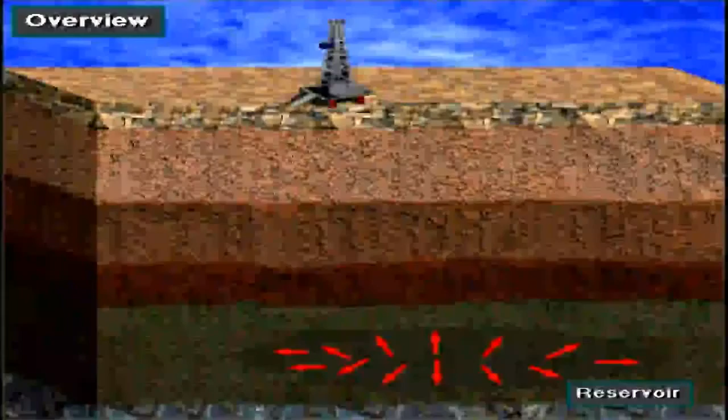Fluids in a formation are under pressure. When drilled, this pressure can escape to the surface if it is not controlled. Normally, drilling mud offsets formation pressure, that is, the weight of the drilling mud keeps fluids in the formation from coming to the surface. For several reasons, the mud weight can become lighter than necessary to offset the pressure in the formation. When this happens, formation fluids enter the hole, this is called a kick.

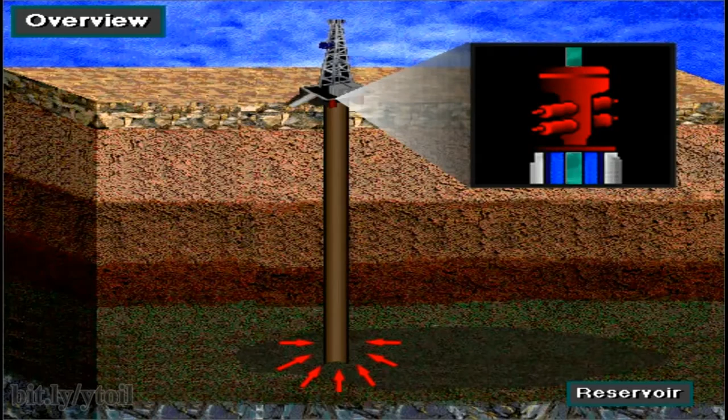A blowout preventer stack is used to keep formation fluids from coming to the surface. These are called BOPs. By closing a valve in this equipment, the rig crew can seal off the hole, preventing more formation fluids from entering it. With the well sealed or shut in, the well is under control.

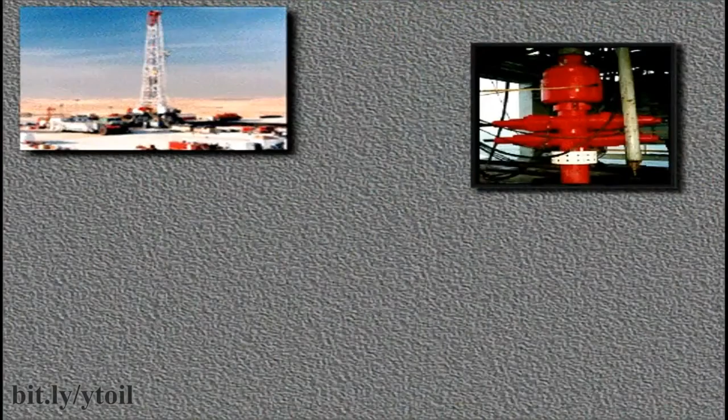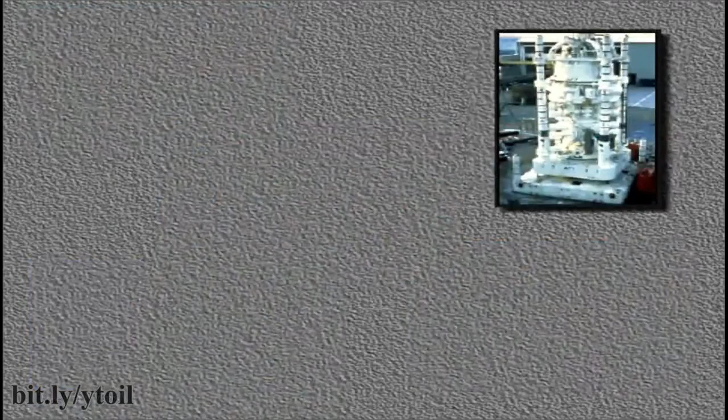Rig crews use a surface BOP system on land rigs, jackup rigs, submersible rigs, and platform rigs. They use a subsea BOP system on offshore floating rigs, like semi-submersibles and drill ships.

Why do you suppose subsea BOP systems are used on semi-submersibles and drill ships? Blowout prevention equipment is very large and very heavy. Semi-submersibles and drill ships are dynamic, that is, they float and thus move with the wind and waves while in the working mode.

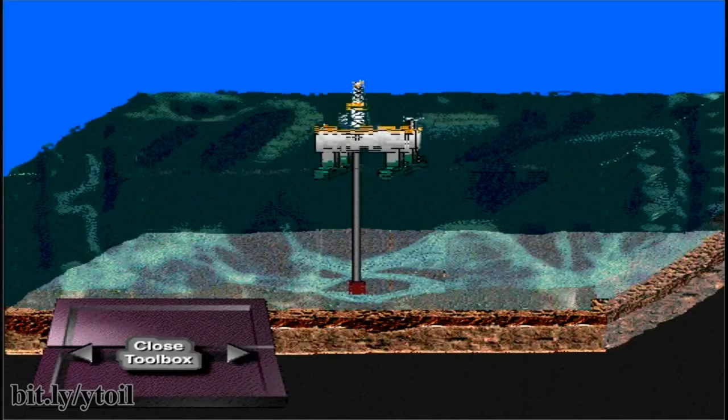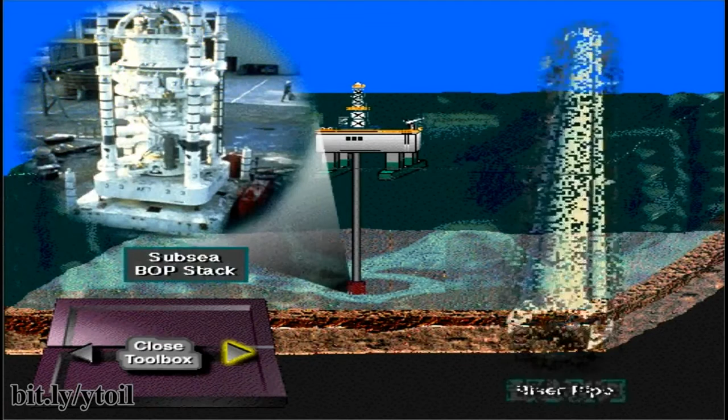On floating rigs, it's not practical to mount the BOP stack on top of the long riser pipe. The BOP stack is much too heavy for the relatively thin and flexible walls of the riser pipe. Also, because the riser walls are relatively thin, they cannot withstand the high pressures that could develop inside the riser

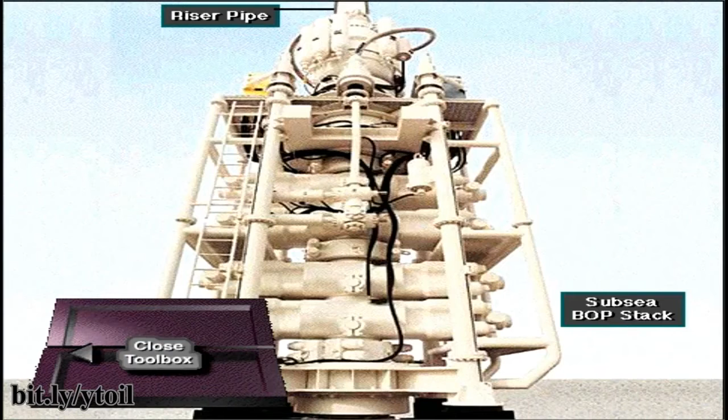when the well is shut in on a kick. So the rig crew mounts the BOP stack on the wellhead at the seafloor and makes up the riser on top of the stack.

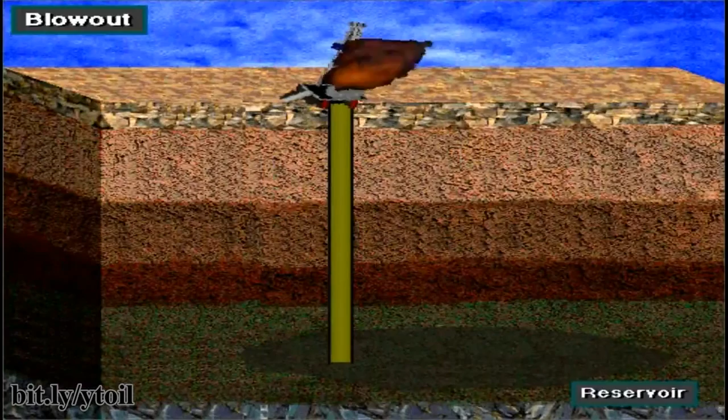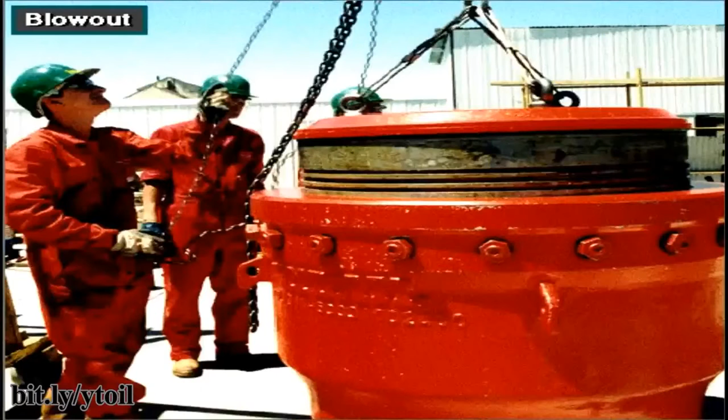A blowout is dangerous. Formation fluids like gas and oil blow to the surface and burn. Blowouts can injure or kill, destroy the rig, and harm the environment. Rig crews therefore train and work hard to prevent blowouts. Usually they are successful, so blowouts are rare. But when they happen, they are spectacular and thus often make news.

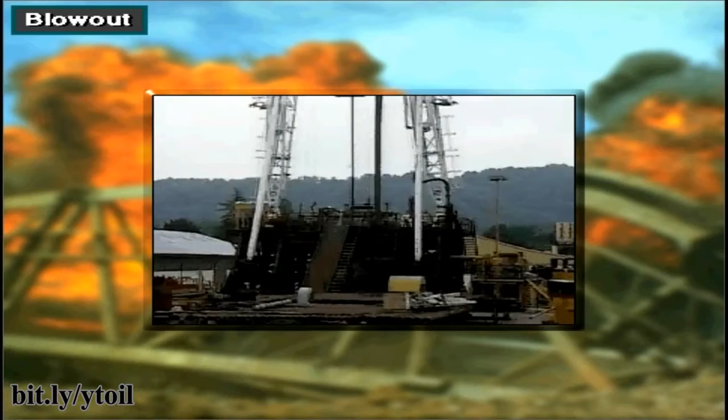A kick is the entry of formation fluids into the wellbore while drilling. A kick occurs when the pressure exerted by the drilling mud is less than the pressure in the formation that the drill string is penetrating.

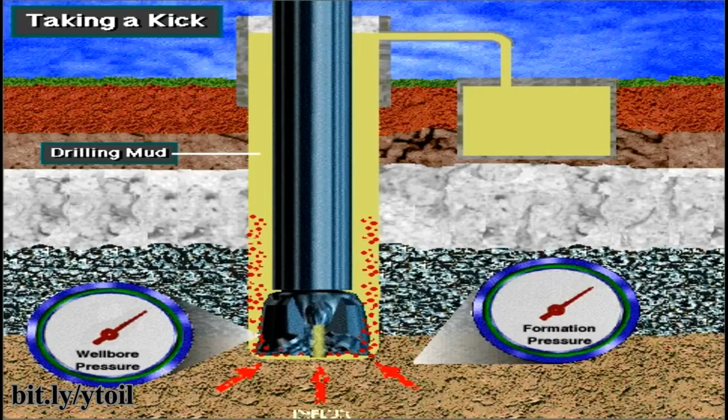The mud that circulates down the drill string and up the hole is the first line of defense against kicks. Drilling mud creates additional pressure as it circulates. The mud pressure keeps formation pressure from entering the wellbore. On the rig, they say mud keeps the well from kicking.

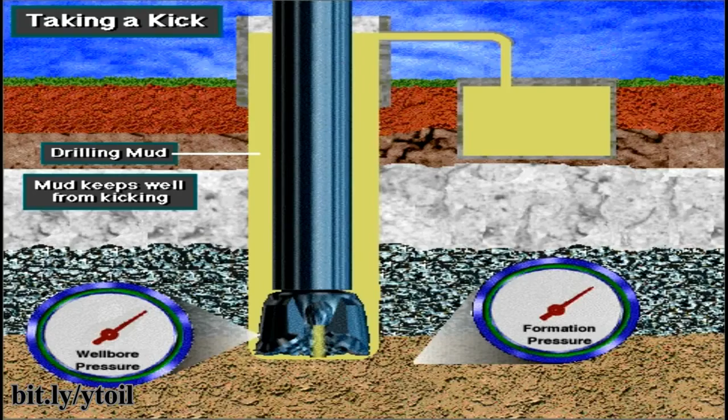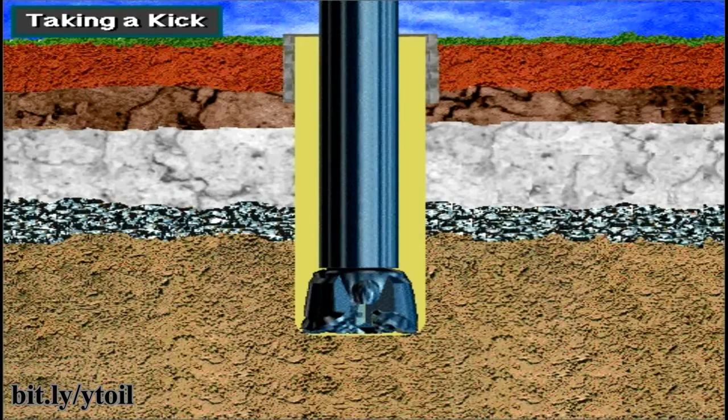Sometimes, however, crew members may accidentally allow the mud level or mud weight in the hole to drop. This can happen for several reasons. For example, the crew may fail to keep the hole full of mud when they pull the pipe out of it, or they may pull the pipe too fast, which can lower the bottom hole pressure.

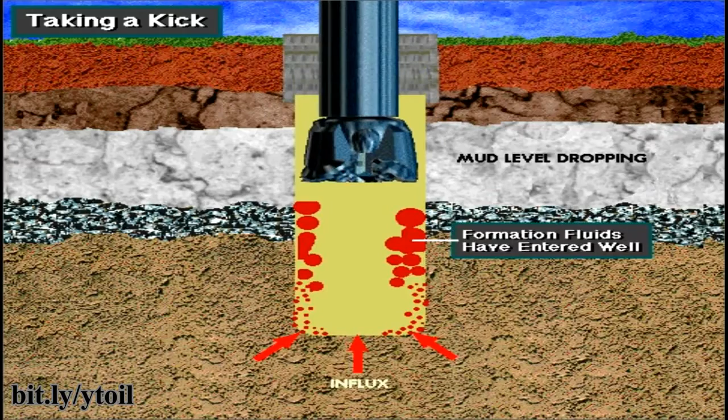When the mud level or mud weight drops, the pressure exerted on the formation decreases. If either happens, formation fluids can enter the hole. If they do, the well takes a kick. In other words, when the formation pressure exceeds the weight of the mud column, the well can kick.

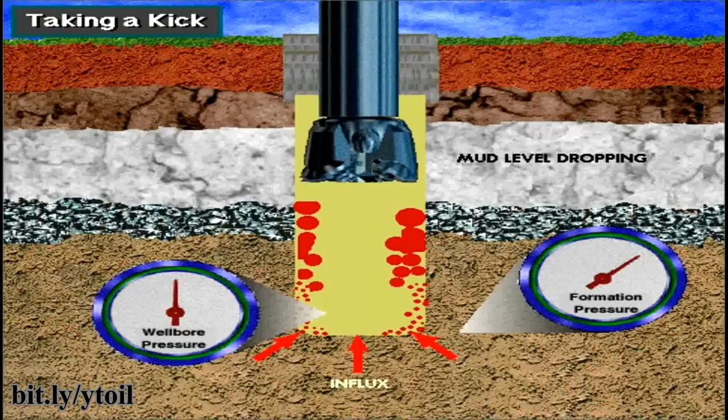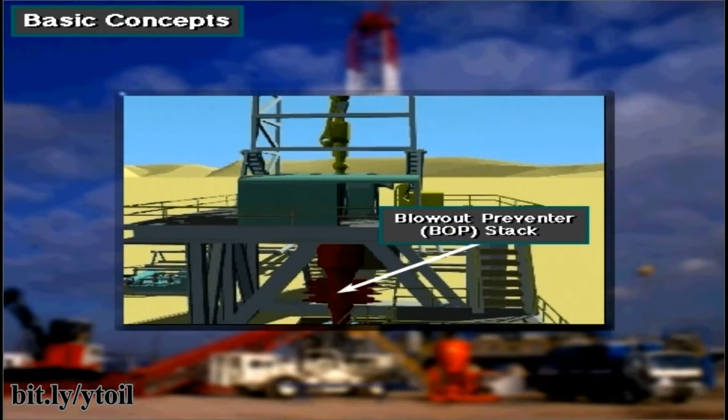To keep a kick from becoming a blowout, the rig crew uses blowout prevention equipment. The blowout preventer, or BOP stack, consists of several large valves stacked on top of each other. These large valves are called blowout preventers.

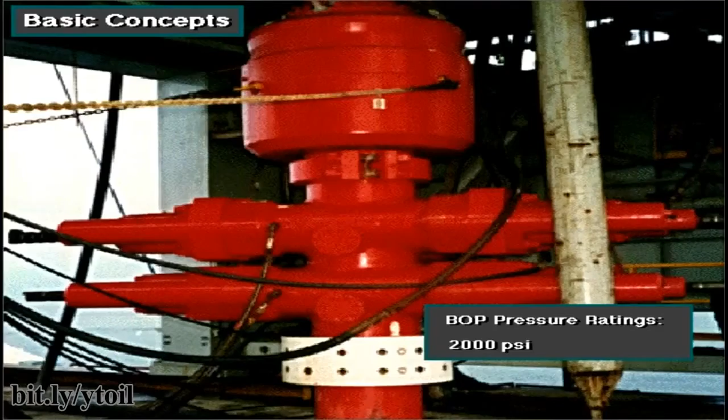Manufacturers rate BOP stacks to work against pressure as low as 2,000 pounds per square inch, or PSI, and as high as 15,000 PSI. That's about 14,000 kilopascals to over 100,000 kilopascals.

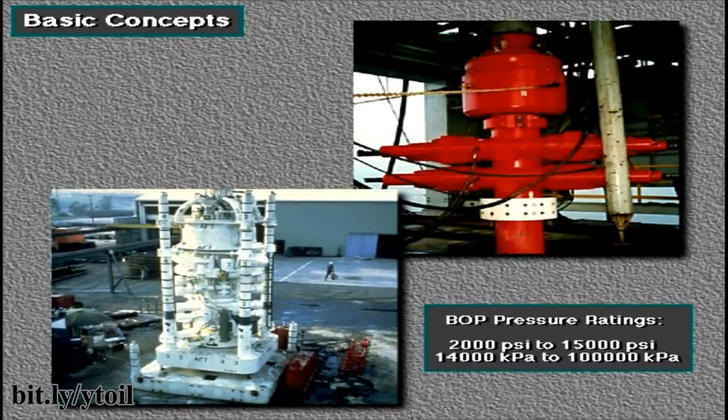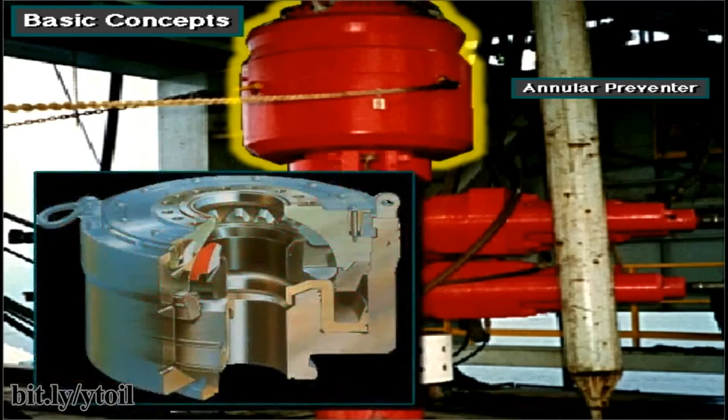Rigs usually have two kinds of preventers. On top is an annular preventer. It's called an annular preventer because it surrounds the top of the wellbore in the shape of a ring, or an annulus.

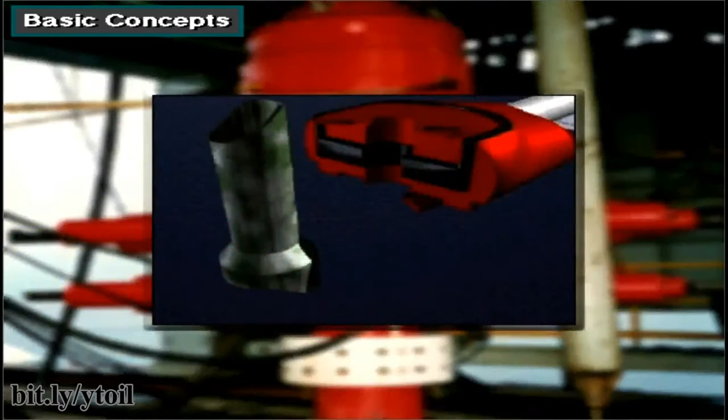Below the annular preventer are ram preventers. The shutoff valves in ram preventers close by forcing or ramming themselves together.

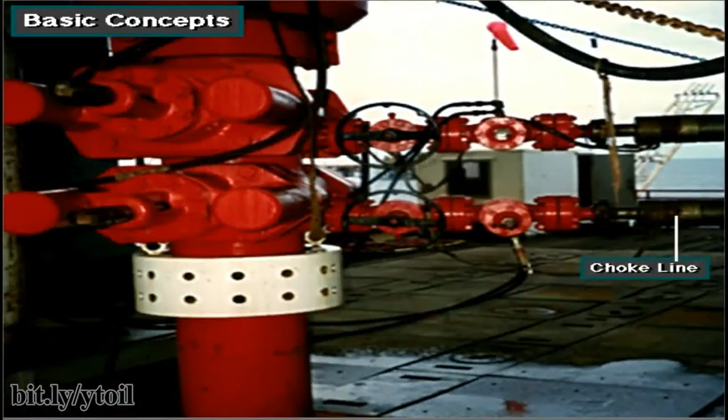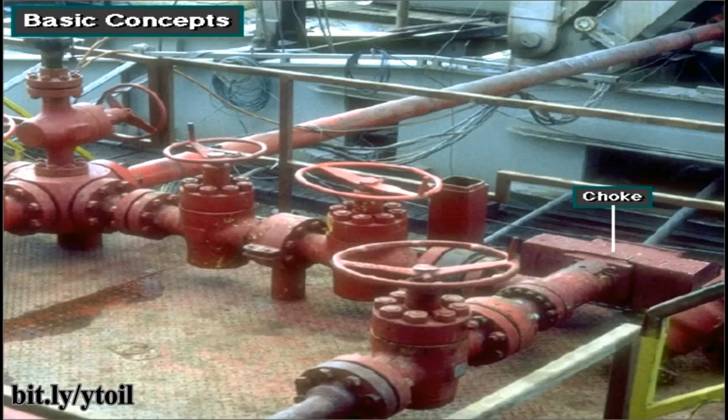The choke line is a line through which well fluids flow to the choke manifold when the preventers are closed. Even though the preventers shut in the well, the crew must have a way to remove or circulate the kick in the mud out of the well. When the BOP shuts in the well, mud and formation fluids exit through the choke line to the choke manifold. The manifold is made up of special piping and valves.

The most important valve is the choke, a valve with an adjustable opening. Crew members circulate the kick through the choke to keep back pressure on the well. Keeping the right amount of back pressure prevents more kick fluids from entering the well. At the same time, they can get the kick out of the well and put in heavier mud to kill the well, that is, regain control of it.

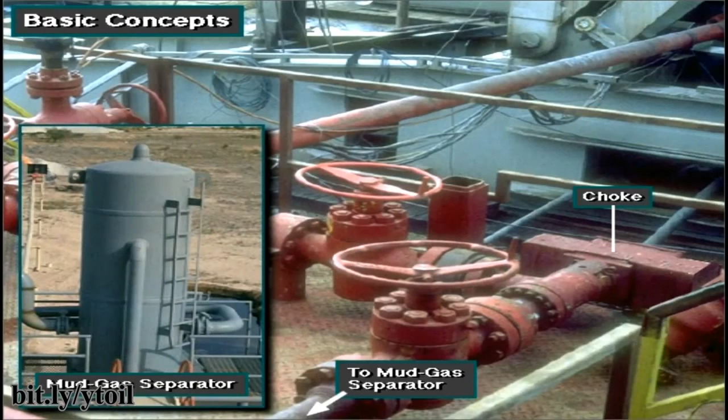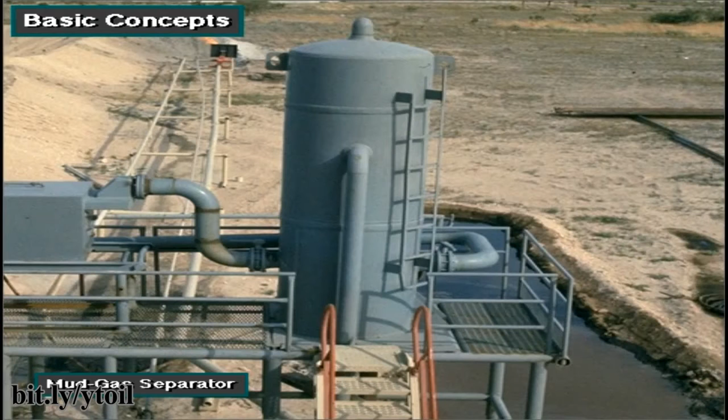The well fluids leave the choke manifold and usually go to a mud gas separator, which separates the mud from the gas in the kick. The clean mud goes back to the tanks, and the gas is flared or burned a safe distance away.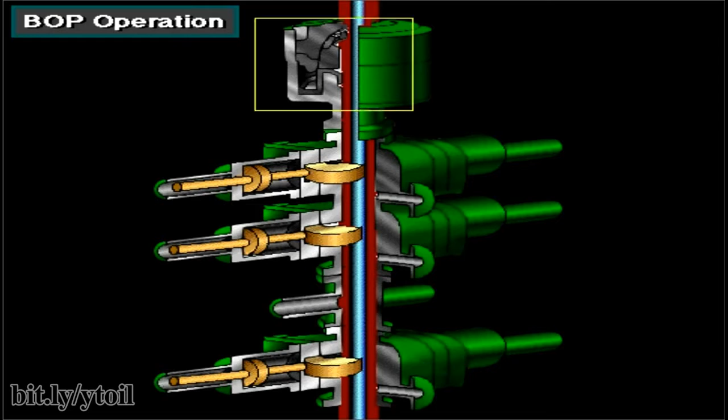When the well takes a kick and the BOPs are open, well fluids force mud to flow up the well bore and into the BOP stack. When the driller closes the annular BOP, flow stops. Usually, drillers close the annular BOP first. The closed annular BOP diverts the flow to the choke line, which goes to the choke manifold. The driller can open a valve on the choke line and safely circulate the kick out of the well through the choke manifold.

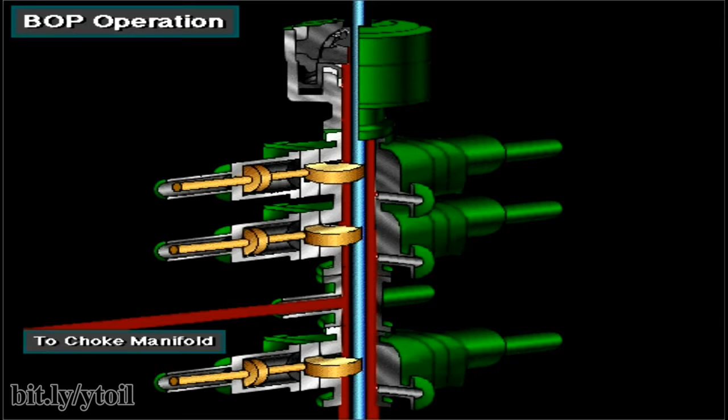Here's an annular preventer. Click on it to see how it works.

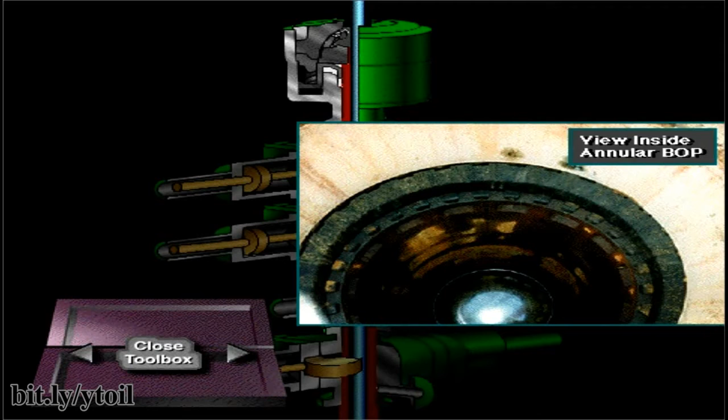An annular BOP closes on drill pipe, drill collars, or any shape of tubular in the well. It can also close on open hole, a hole with no tubulars in it at all. It's usually the first preventer used to close in the well.

Here are 4 types of ram preventers: pipe rams, blind rams, blind shear rams, and variable bore rams. Click on each one to see how the rams work.

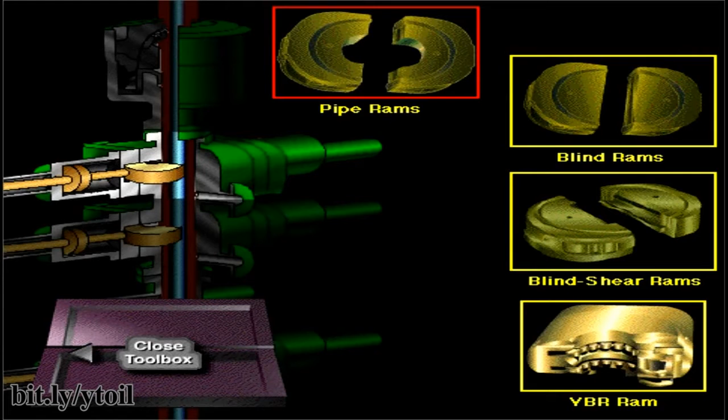Pipe rams are used when there is drill pipe in the BOP stack. The pipe rams fit around the pipe, closing off the annulus. Pipe rams back up the annular preventer, that is, in the unlikely event that the annular BOP failed, crew members could shut the pipe rams to seal the well. Also, some pipe ram preventers are used to hang off or suspend the drill string on subsea BOPs.

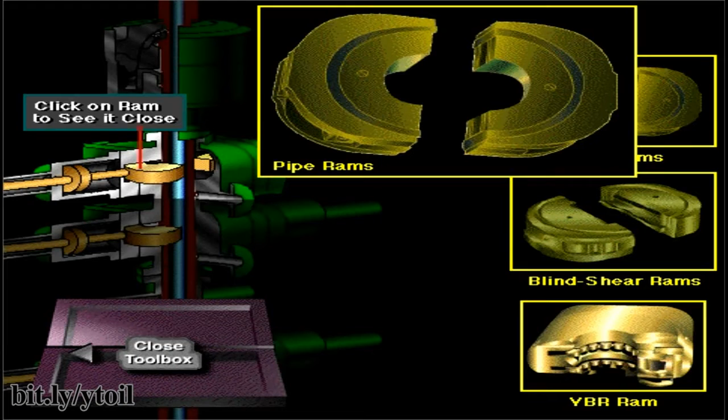Blind rams are designed to seal an open hole. If the annular BOP fails, and there is no pipe in the hole, the crew could seal the well by closing the blind rams.

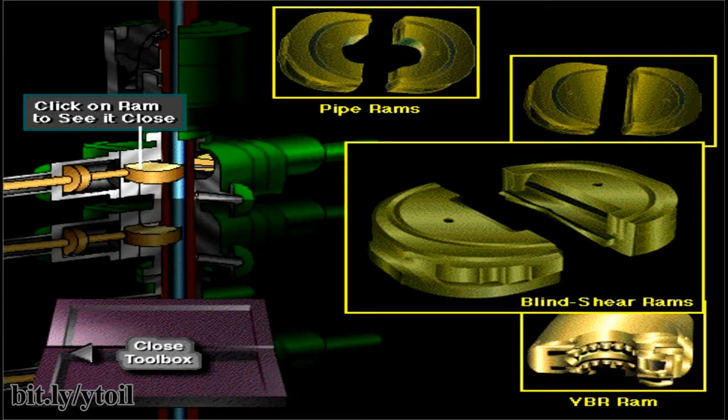Blind shear rams are designed with blades that cut through the drill pipe and then seal the open hole. They are used in extreme emergencies, like when an offshore floating rig has to move off a well they're drilling because of a hurricane or other such emergency. Blind shear rams allow them to cut the pipe, seal the hole, and then move the rig a safe distance away.

Variable bore rams, or VBR, are special pipe rams that can close over a range of pipe sizes, such as 5-inch diameter to 3-inch diameter.

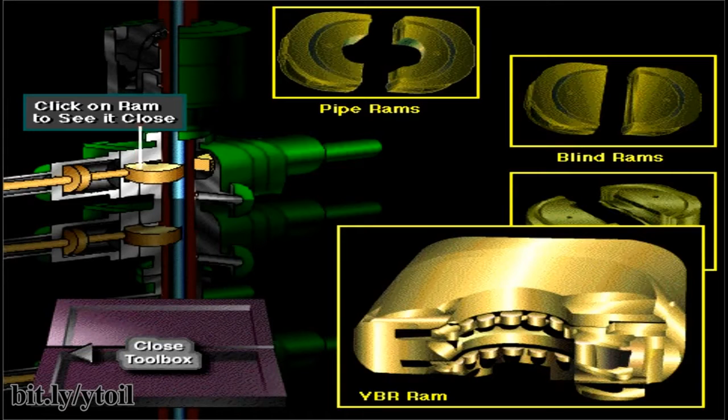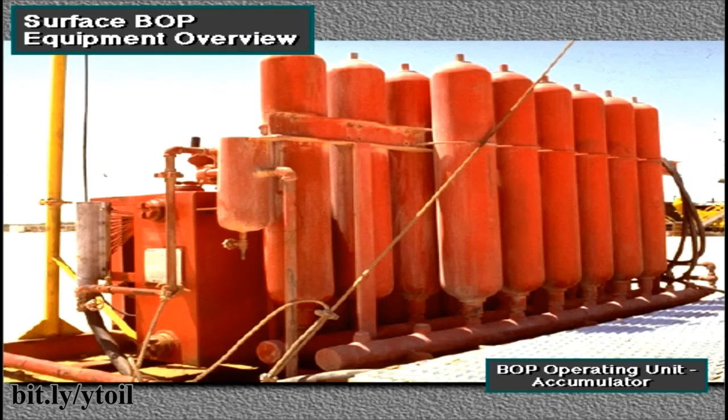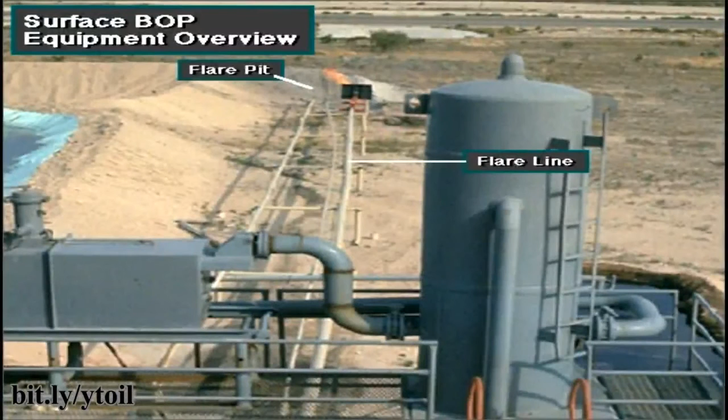Here are the major parts of a land, jackup, platform, or submersible rig's blowout prevention equipment: the blowout preventer or BOP stack, the driller's BOP control panel, the BOP operating unit accumulator, the choke manifold, the choke control panel, the mud gas separator, the flare line and flare pit, the trip tank, and drill string valves.

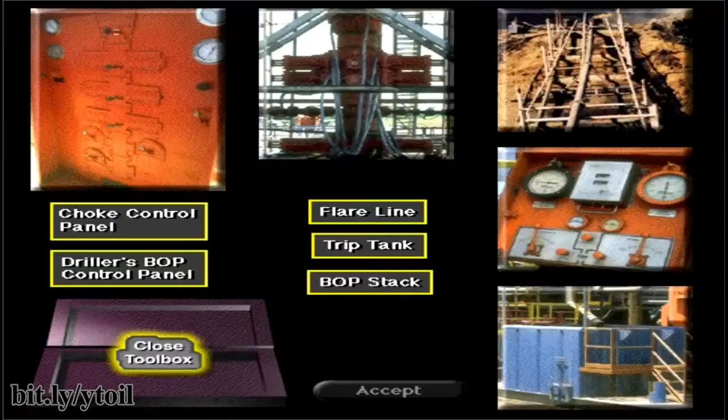Pop quiz. You've just learned the names of the equipment used in well control operations. Let's see how well you can identify the equipment.

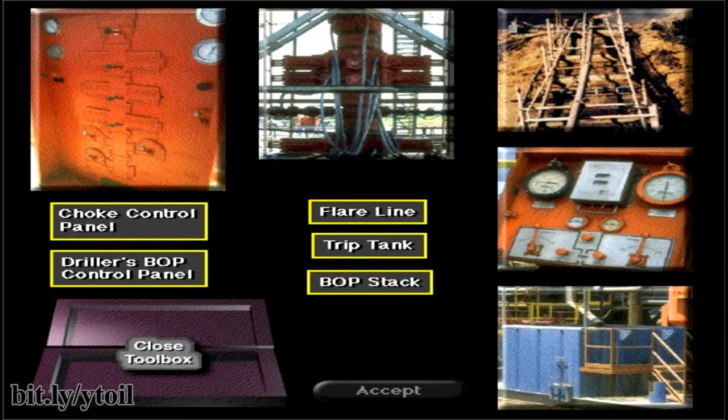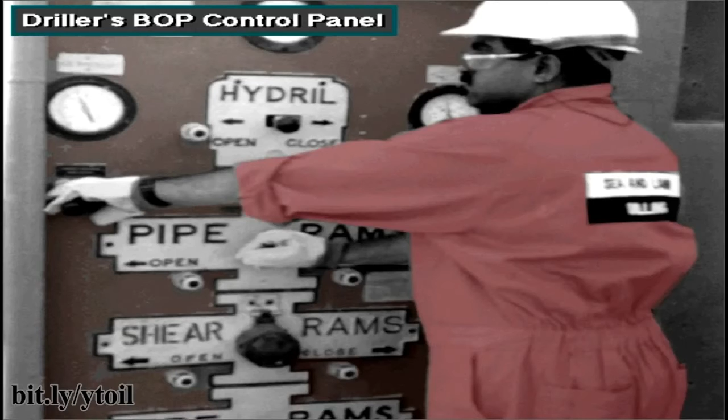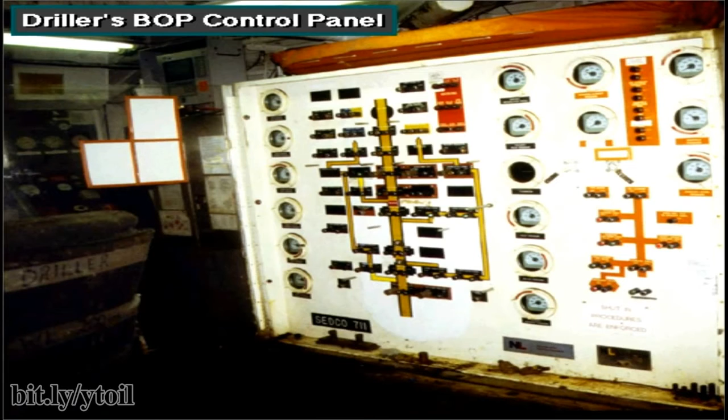From this BOP control panel, the driller opens and closes or controls the blowout preventers and the line to the choke manifold. Rig builders usually place the control panel on the rig floor, close to the driller's position. Levers and switches allow the driller to quickly open and close the preventers and other valves in the system.

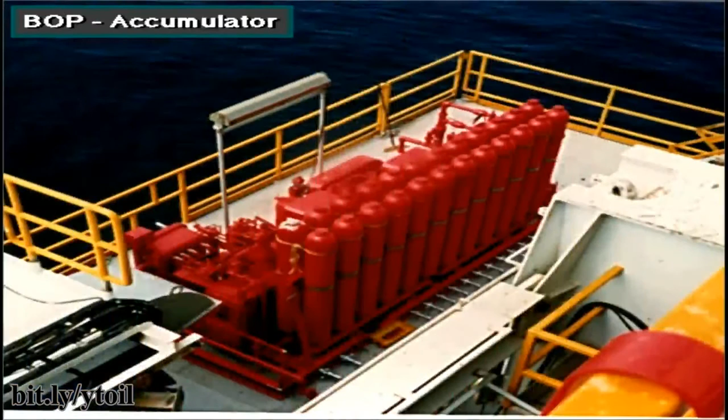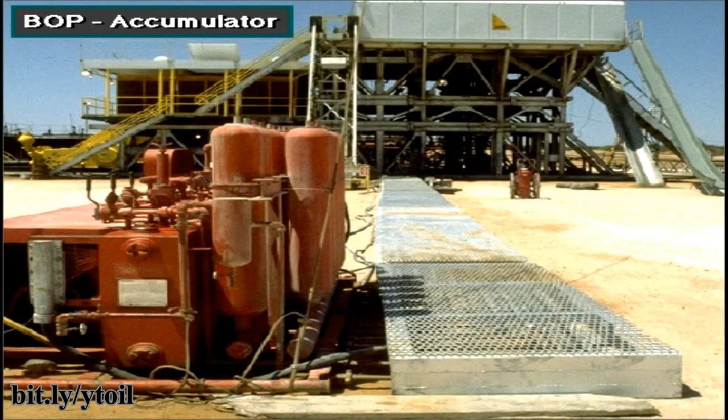The accumulator bottles store or accumulate hydraulic fluid under very high pressure, up to 3,000 psi, over 20,000 kilopascals. This high-pressure fluid ensures that the preventers close very fast. The BOP operating unit accumulator is installed some distance from the rig floor.

When the driller activates the BOP operating unit, it pumps the hydraulic fluid through the high-pressure pipes or lines into the BOP stack. The hydraulic pressure opens or closes the preventers.

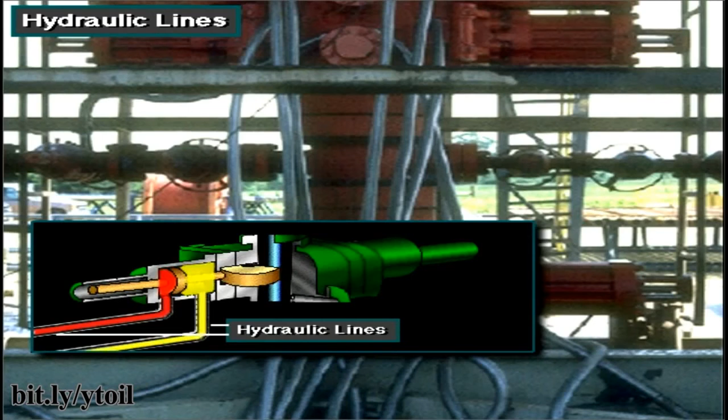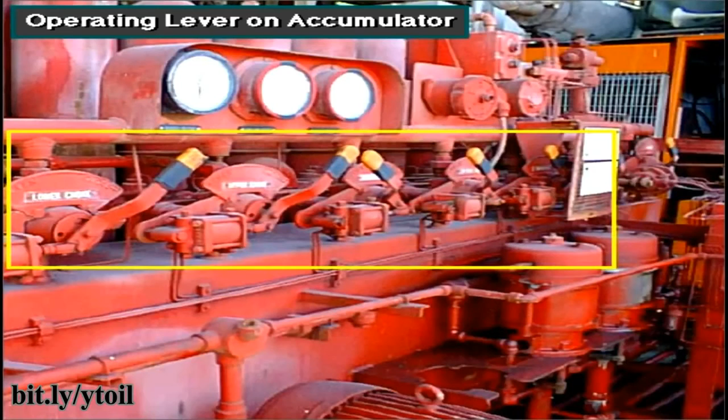Usually, the driller operates the accumulator from the control panel on the rig floor. In an emergency, however, crew members can operate the BOPs by using the control valves on the accumulator itself.

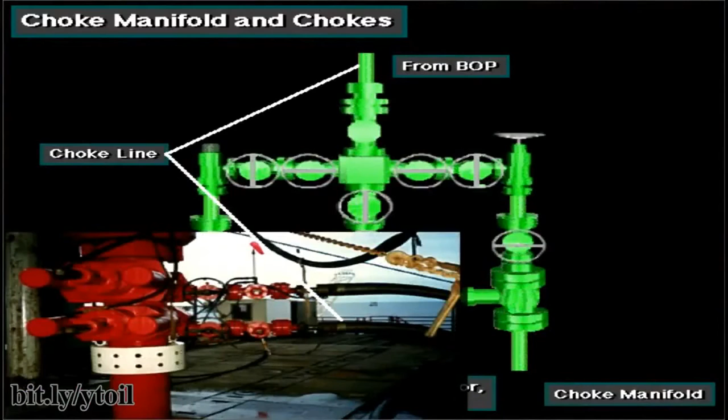Here's a choke manifold. Flow gets to it from the BOP stack via a choke line. The manifold usually has 2 or more special valves in it called chokes. Usually well flow goes through only one of the chokes.

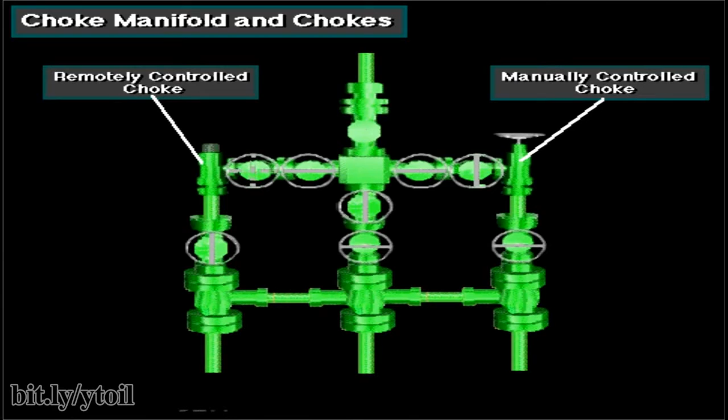The others are backups or used under special conditions.

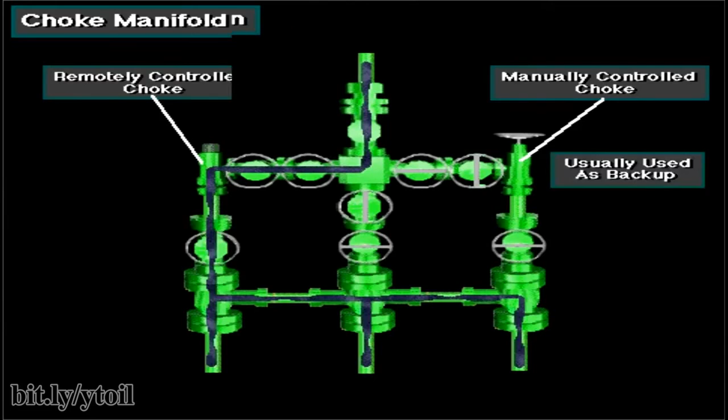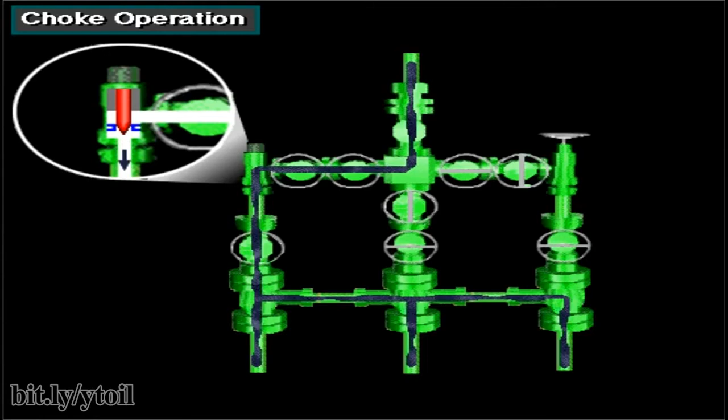By adjusting the size of the opening in the choke, making it larger or smaller, the driller adjusts the amount of flow through the choke. The smaller the opening, the less flow; the larger the opening, the more flow. The less flow, the more back pressure on the well; the more flow, the less back pressure on the well.

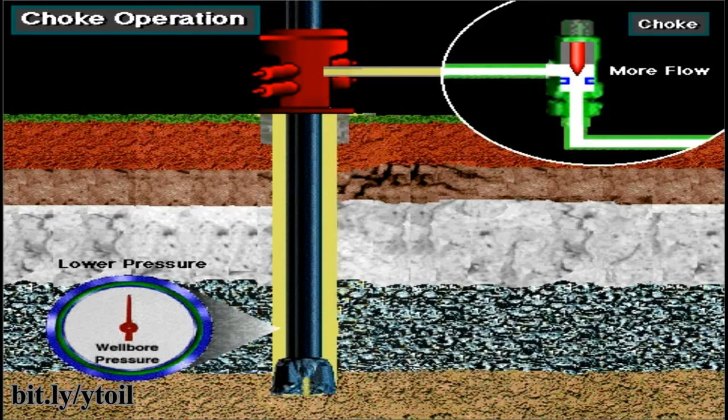This adjustment of back pressure keeps the pressure on the bottom of the hole constant, so that no more kick fluids can enter the well.

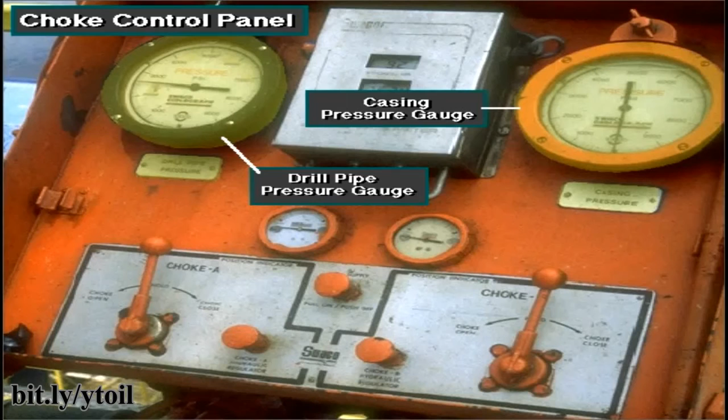The driller or another crew member uses the choke control panel to adjust the size of the choke's opening as kick fluids flow through it. By watching the pressure on the drill pipe and casing, and by keeping the mud pump at a constant speed, the choke operator can adjust the choke to keep the pressure on the bottom of the hole constant. The choke operator must keep the bottom hole pressure constant to successfully control and circulate a kick out of the hole.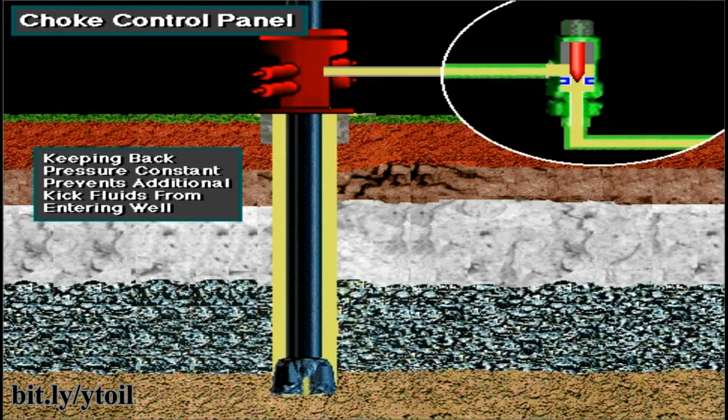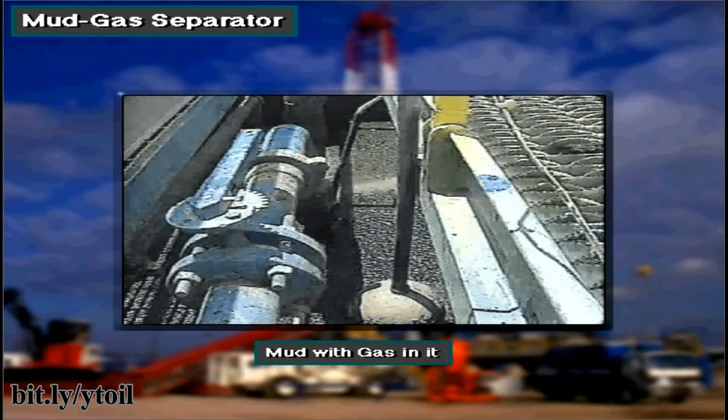Often, kick fluids in mud from the choke manifold go through a line to a mud gas separator. Frequently, formation gas is the main part of a kick; however, kick fluids may also contain water, oil, or a combination of these fluids. In any case, the mud gas separator removes the gas from the mud. With the gas removed, the pump circulates gas-free mud into the mud tanks and back down the hole. The separated gas goes to a flare line.

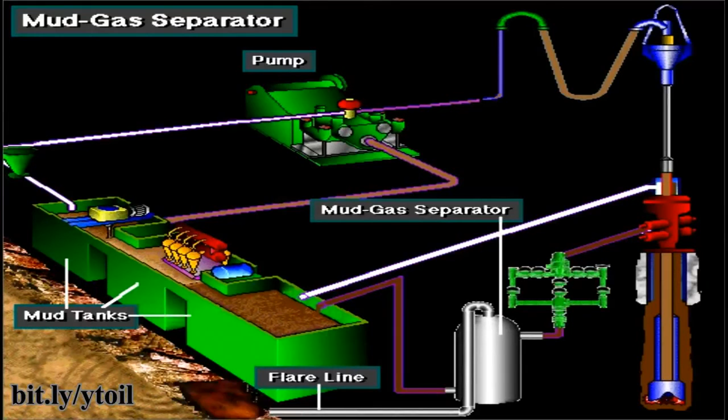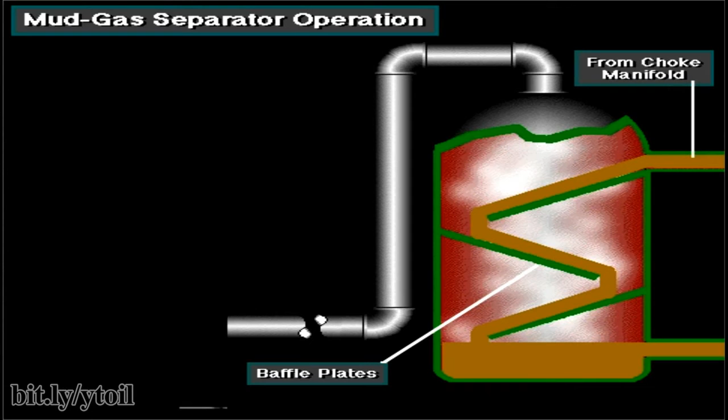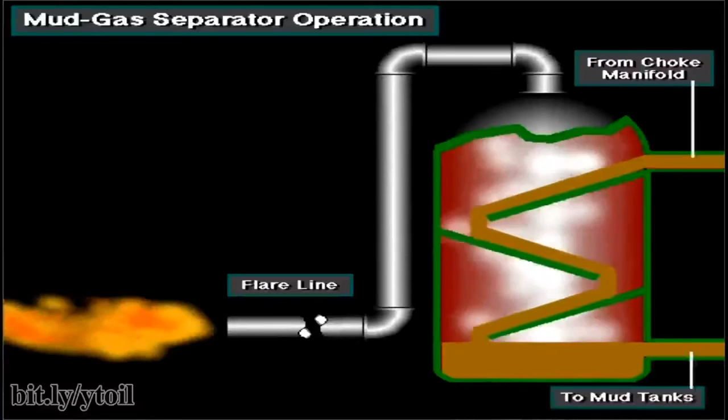In the separator, mud with gas in it from the choke manifold enters the top and falls over several baffle plates. The gas breaks out of the mud as it falls over the baffle plates and goes into the flare line. The gas-free mud falls to the bottom outlet, where it goes to the mud tanks for circulation downhole.

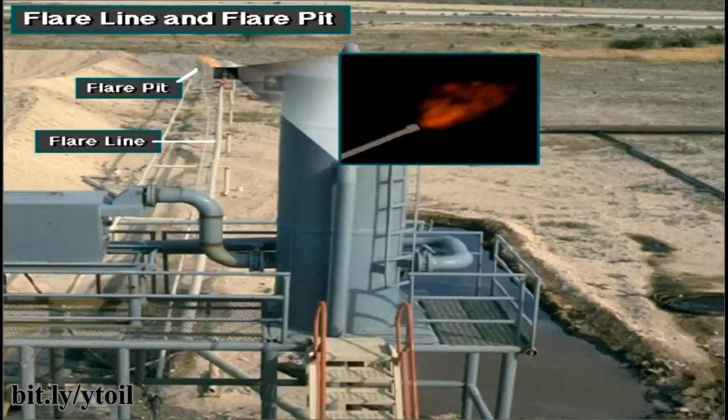The flare line conducts gas from the mud gas separator to a flare pit on land rigs. The gas is burned, or flared, at the flare pit. Notice that the flare line outlet is a good distance away from the rig floor, so even while gas is flaring, the crew can still safely work on the rig floor.

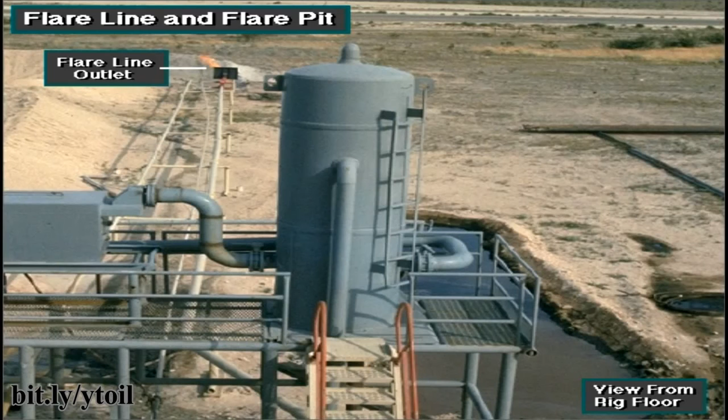Offshore, where there's no flare pit, the flare line conducts the gas over the side of the rig. The line runs over the water a safe distance away from the rig.

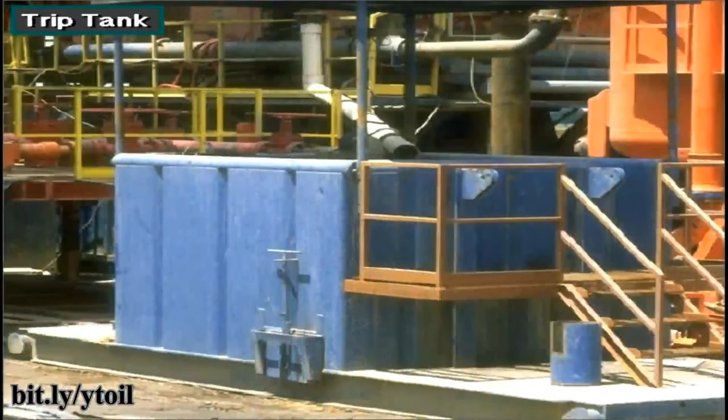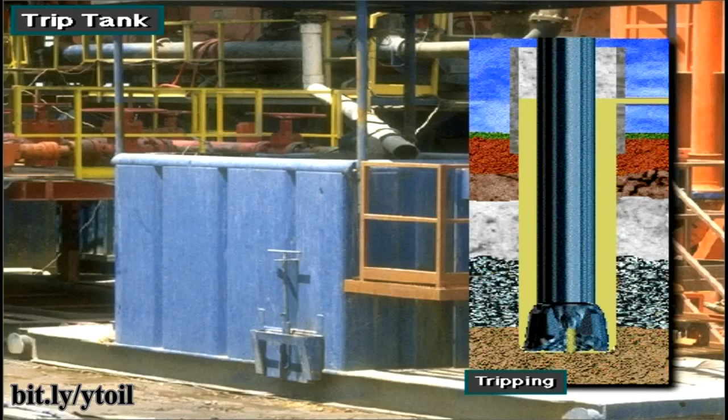A trip tank is a special mud tank. It is used when they pull drill string from the hole, for example, to change out a dull bit. They also use a trip tank when they run drill string back into the hole. Pulling the drill string and running it back in is called a trip, which is why they call this small tank a trip tank. They use it to keep accurate track of how much mud the drill string displaces in the hole.

When the crew pulls drill string from the hole, the mud level in the hole drops. If they let the mud level drop too far, it won't exert enough pressure to keep formation fluids from entering the hole.

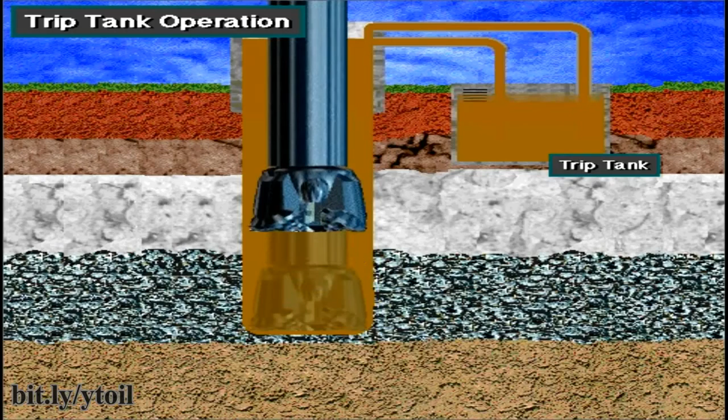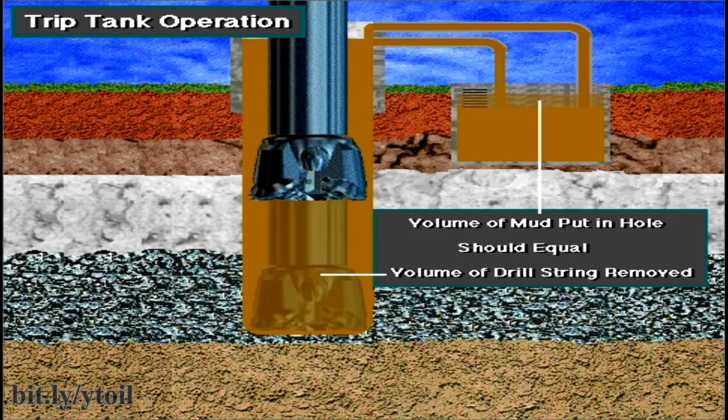So, as the crew pulls pipe, they continually circulate fluid from the trip tank to replace the drill string and keep the hole full. They also watch for unusual changes, and make sure that the volume of mud they put in exactly replaces the volume occupied by the drill string. Since the volumes are small, the level of mud in the trip tank is calibrated in small increments, such as stands of pipe, or barrels, or liters of mud, or both.

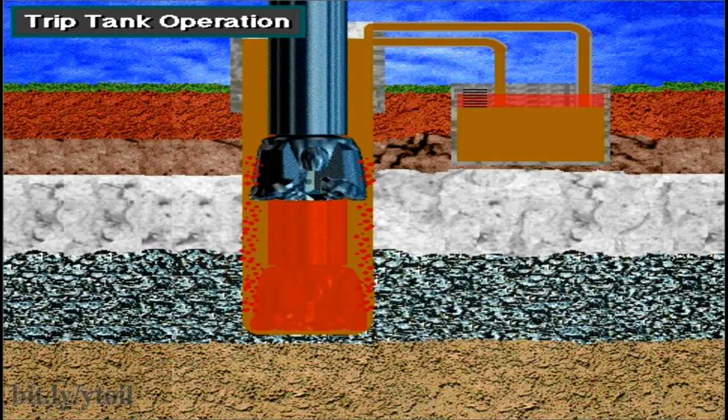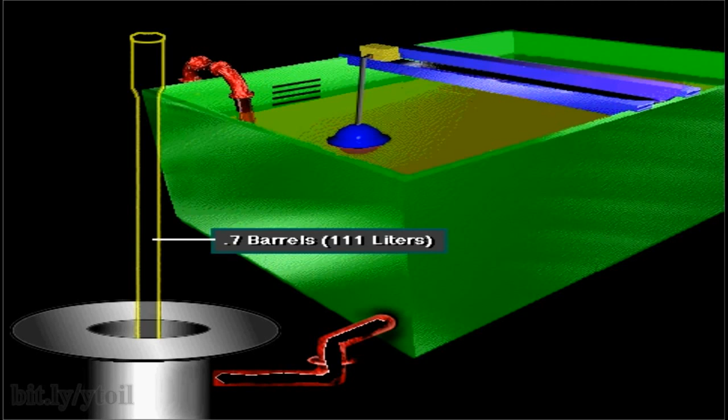If the volume they put in is less than the volume occupied by the drill string they removed, then it's likely that formation fluids have entered the hole. For example, let's say the crew pulls one stand of drill pipe. In this instance, the stand displaces 0.7 barrels or 111 liters. Therefore, they should pump 0.7 barrels or 111 liters of mud to replace the stand, and the mud level in the trip tank should show a drop of 0.7 barrels or 111 liters. If the level in the tank shows less, then formation fluids have entered the hole, and the crew must take steps to control the well.

As the hole empties, if they let the mud level drop too far, it won't exert enough pressure to keep formation fluids from entering the hole. So, as the crew pulls pipe, they continually circulate fluid from the trip tank to replace the drill string and keep the hole full, watching for unusual changes.